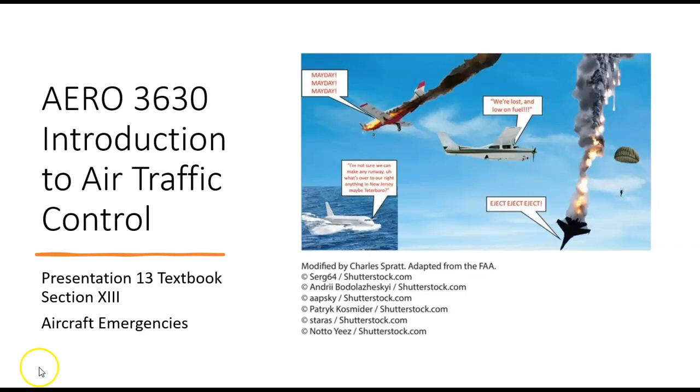Welcome to AERO 3630, Introduction to Air Traffic Control, Presentation 13 on Textbook Section 13 concerning aircraft emergencies. In this presentation, we'll go over terms and definitions, minimum and other required information during aircraft emergencies, the roles and responsibilities of air traffic controllers, and different types of aircraft emergencies.

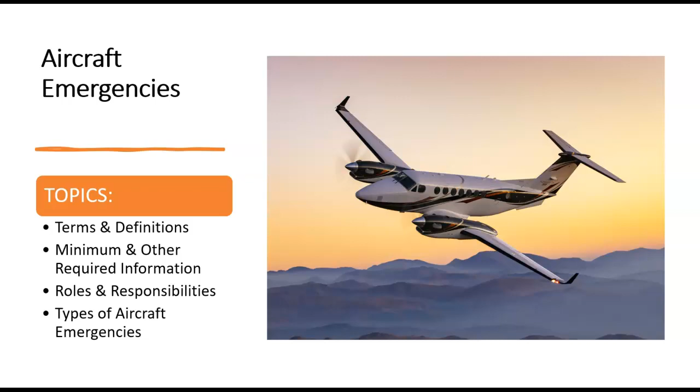It's an unfortunate part of the air traffic controller's job, but sometimes bad things happen. Sometimes airplanes fail mechanically. However, most accidents and most emergencies are created by poor aeronautical decision-making by the humans in the aircraft. Aircraft emergencies occur daily around the country. An air traffic controller can encounter an aircraft in distress at any time.

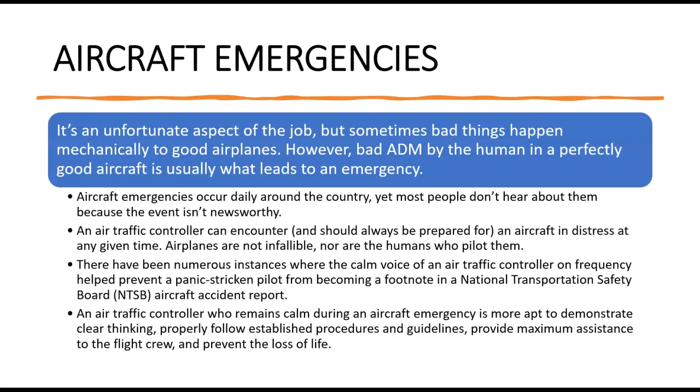And there have been numerous instances where an air traffic controller with a calm voice on the frequency prevents a panic-stricken pilot from becoming a statistic. An air traffic controller who remains calm during an aircraft emergency is more apt to demonstrate clear thinking and also follow properly established procedures and guidelines.

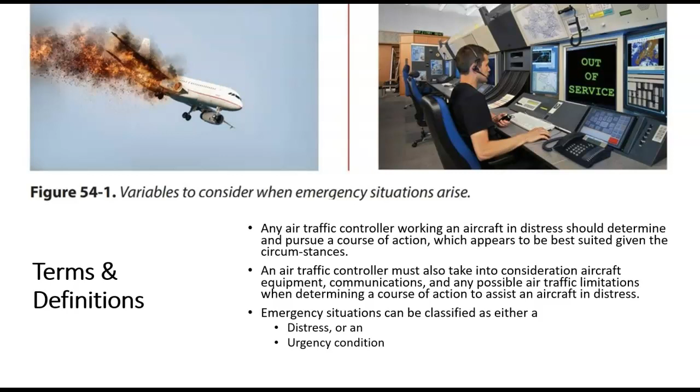So let's just talk about a couple of terms and definitions. Air traffic controllers that work an aircraft in distress need to determine what course of action to take that appears to be best suited to the given circumstances. Air traffic controllers must also take into consideration equipment, communications, and other limitations. And there are two emergency situations. They can be classified as either a distress or an urgency condition.

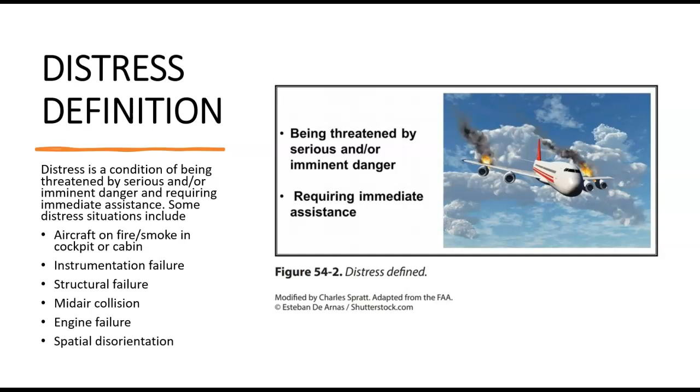A distress condition is a condition where the pilot is threatened by serious or imminent danger, and it requires immediate assistance. Some of these include aircraft fire or smoke in the cockpit, instrumentation failure, structural failure, mid-air collision, engine failure, or spatial disorientation. A pilot that is experiencing a distress situation should broadcast the word Mayday, preferably repeated 3 times, and this should get the attention of air traffic control.

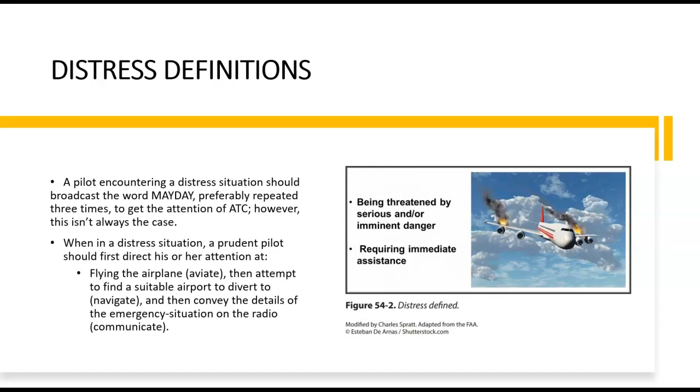When a distress situation occurs, a pilot should first direct his attention to flying the airplane. Remember, always first and foremost, fly the airplane, and then attempt to find a suitable airport to divert, and then communicate details of the situation on the radio.

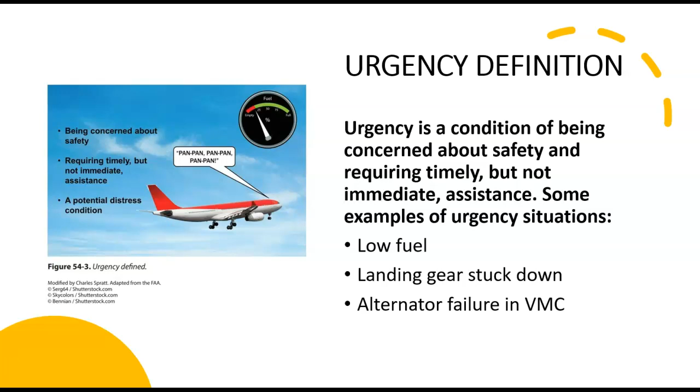An urgency condition is not as serious as a distress condition, but it's a condition where safety and timeliness are important, but immediate assistance is not necessary. Some examples include low fuel, landing gear problems where the landing gear maybe is stuck down, for example, or an alternator failure in visual meteorological conditions. A pilot that is experiencing an urgency condition should broadcast the term Pan-Pan repeated 3 times on the frequency.

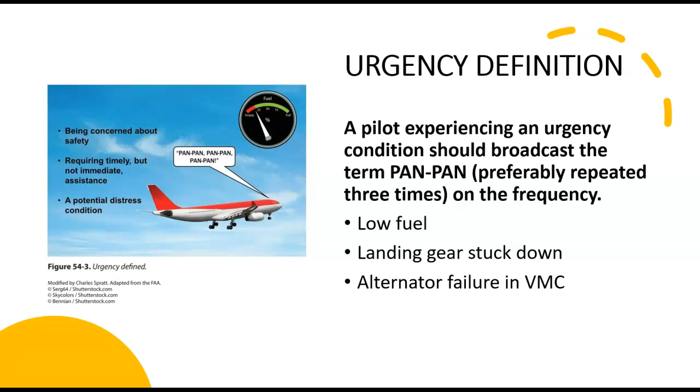Air traffic controllers are required to consider an emergency condition exists if it's declared by the pilot, air traffic control personnel, or the aircraft owner or anyone responsible for the operation of the aircraft. Controllers should also consider that an emergency exists if there's an unexpected loss of radar contact, reports indicate that the aircraft has made a forced landing, the crew is about to abandon or has abandoned an aircraft, or if they see an emergency transponder code 7700.

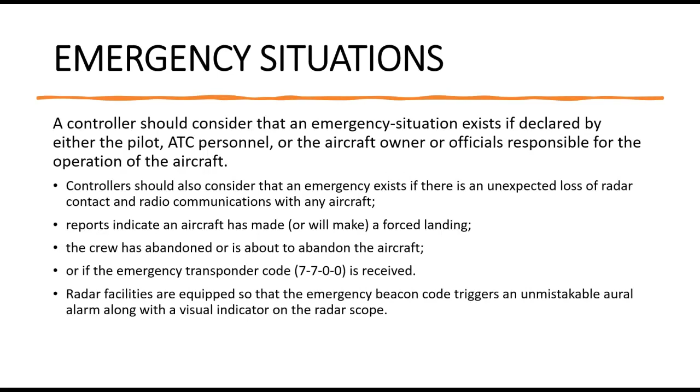Radar facilities are equipped so that any emergency beacon code triggers an aural alarm and a visual indicator on the radar scope. Air traffic controllers should also consider that an emergency exists if intercept or escort aircraft services are required, there is a need for ground rescue or that seems likely, or an ELT, or emergency locator transmitter, signal is heard or has been reported.

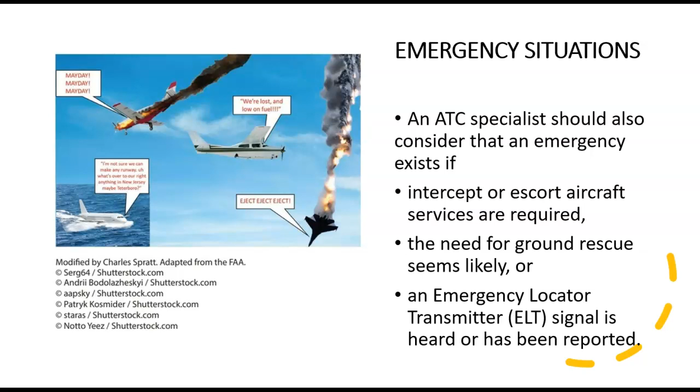The 2 universal worldwide emergency frequencies are VHF 121.5 or UHF 243.0. In civil aircraft, the VHF frequency 121.5 is the most frequently used. While 121.5 and 243.0 are both emergency frequencies, it's best to remain on the frequency with an air traffic controller if you're already talking to air traffic control. There's no need to switch to the emergency frequencies. In addition, the air traffic controller should only change the frequency to the emergency frequency if there's a valid reason for doing so.

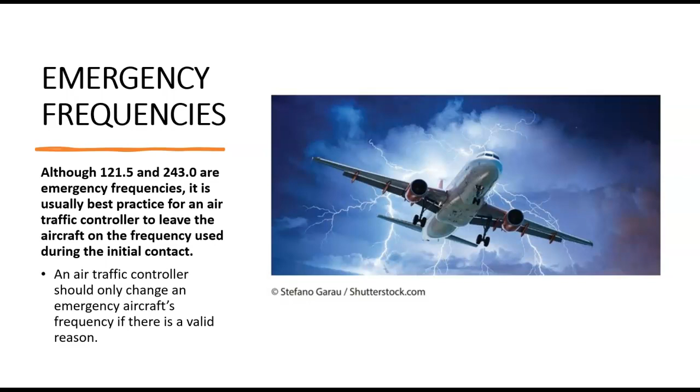Now, ELTs, or emergency locator transmitters, are required equipment for most certificated aircraft, and they are battery-operated radio transmitters that emit a distinct tone on emergency frequencies, for example, 121.5. When an ELT is armed and it experiences crash-generated G-forces or impact forces, they're designed to automatically activate and emit the signal on those two frequencies that we mentioned before for at least 48 hours.

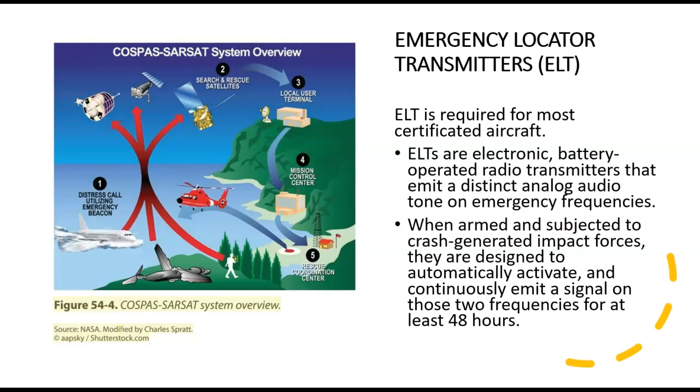The newest generation of ELTs transmit a signal on 406 megahertz and can send a digitally encoded message containing the owner's information, the aircraft data, and the exact geographic coordinates, which allows for faster location by search and rescue personnel. These ELTs are registered by the owners with the National Oceanic and Atmospheric Administration, or NOAA, and they're monitored by the COSPAS and SARSAT satellite systems.

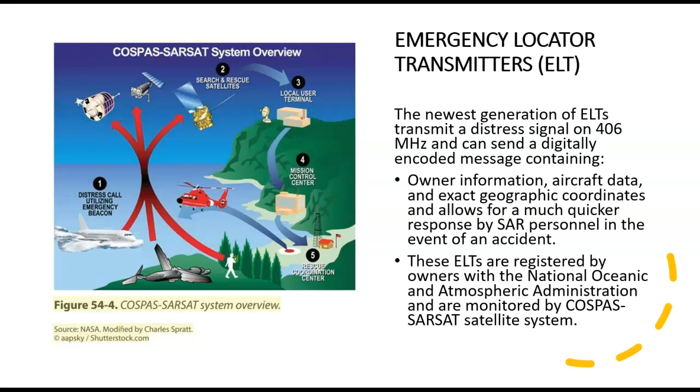Now, there is a minimum amount of information that's required by an air traffic controller in any kind of an emergency situation, and that includes the aircraft identification and type, nature of the emergency, and the pilot's desires or request.

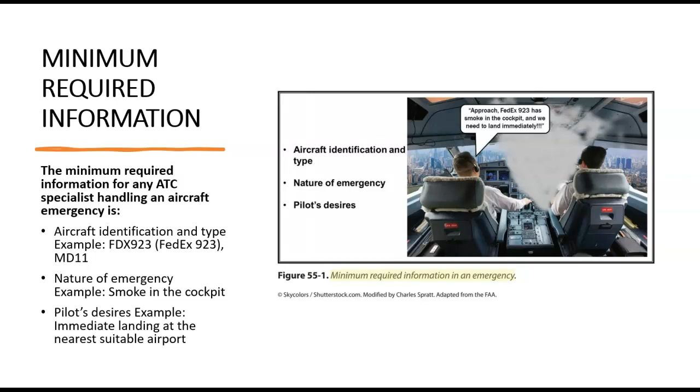Once the air traffic controller initiates communication with the pilot of an aircraft that is having an emergency, other information should be obtained as necessary, including the aircraft's altitude, fuel remaining, weather that the pilot is experiencing, pilot capability for IFR flight, time and place of the last known position, heading since the last known position, the airspeed, navigation equipment capability, NAVAID signal reception, visible landmarks, the aircraft's color, the number of people on board, point of departure and destination, and also any emergency equipment on board.

As far as roles and responsibilities are concerned, the pilot in command, or the PIC, is directly responsible and has the final authority for the operation of the aircraft. And in an emergency, the PIC has the authority to deviate from any rule and any regulation to meet the emergency. An air traffic controller in contact with the pilot should handle the emergency along with coordinating with other facilities

who can assist. The air traffic controller should only transfer responsibility of the emergency aircraft to another facility if better handling can be provided. Frequency change should only be made for a valid reason, and when the air traffic controller receives information about the emergency, the supervisor should be informed.

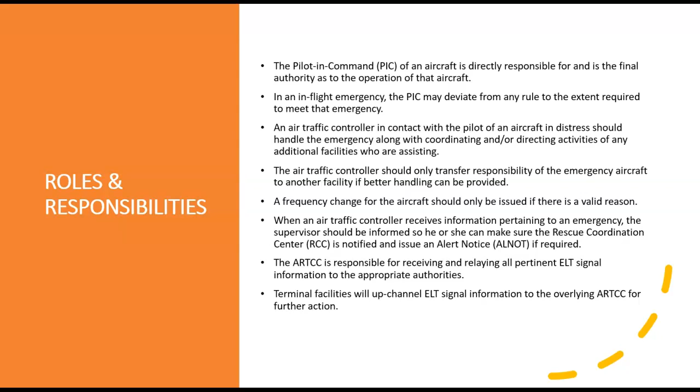Air route traffic control centers are responsible for receiving and relaying all information about ELT signals to the appropriate authorities, and terminal facilities will upchannel the ELT signal information to the overlying air route traffic control center for further action.

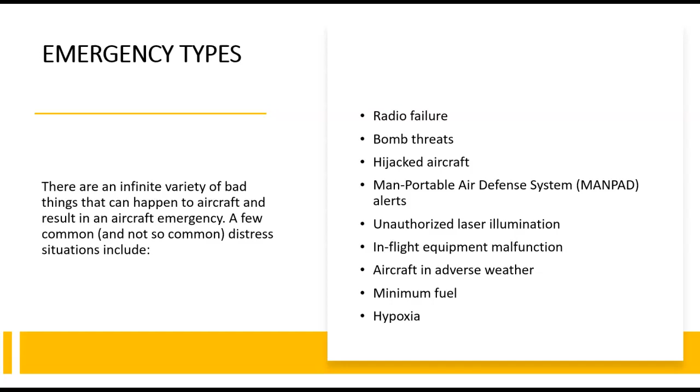The number of different aircraft distress situations is infinite. They include things like radio failures, bomb threats, hijacked aircraft, man-portable air defense system alerts, unauthorized laser illumination, in-flight equipment malfunctions, aircraft in adverse weather, minimum fuel, and hypoxia.

An aircraft that experiences two-way radio failure is expected to squawk 7600 on the transponder. And this will alert air traffic facilities that the aircraft is having problems with its two-way radio communication. An aircraft that squawks 7600 causes RDOF in en route facilities and RF in terminal facilities to appear

on the radar scope. So when an aircraft experiences a two-way radio failure, the controller should establish or attempt to establish communications using other methods such as emergency frequencies, navaids with voice transmission capability, or attempting to relay instructions through other aircraft.

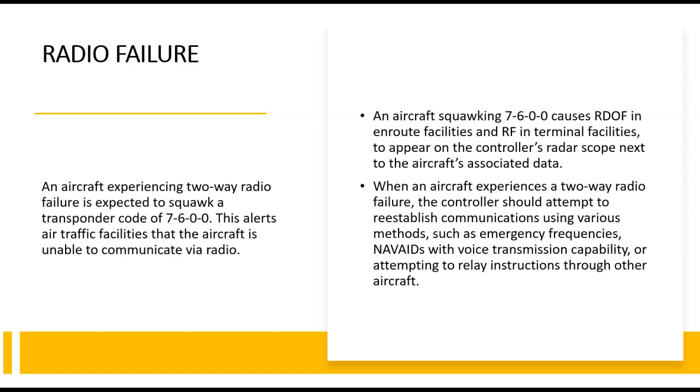If a bomb threat is received from any source, the air traffic controller is required to notify the supervisor or the facility air traffic manager. If a bomb threat is general in nature, it's always handled as suspicious and reported to the appropriate authorities.

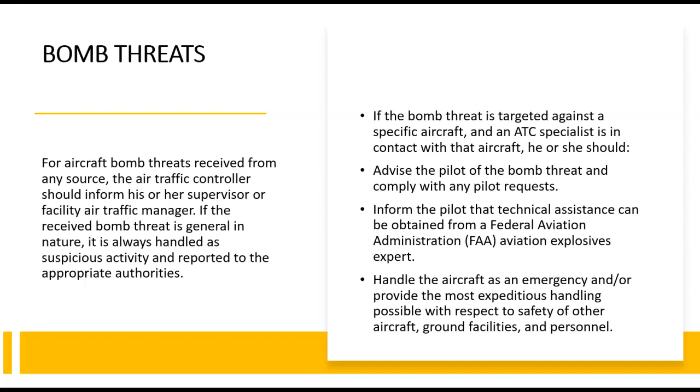If a bomb threat is targeted against a specific aircraft, the air traffic control specialist in contact with the aircraft should advise the pilot of the bomb threat and comply with any pilot requests. Inform the pilot that technical assistance can be obtained from the FAA, including an aviation explosive expert, and handle the aircraft as an emergency. Provide the most expeditious handling possible with respect to safety of other aircraft and ground facilities, and also personnel.

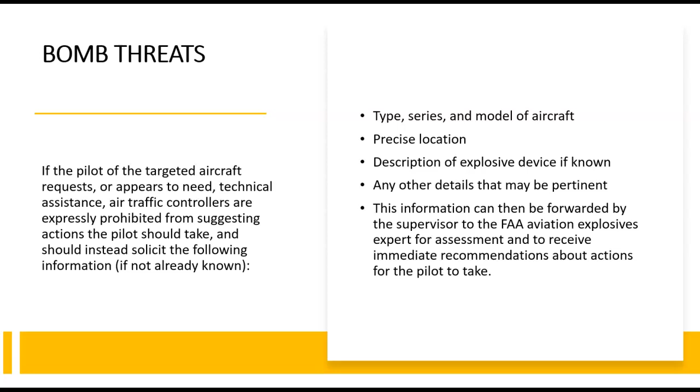If the pilot of a targeted aircraft needs technical assistance, air traffic controllers are prohibited from suggesting any actions, but instead should solicit the following information if it's not already known: type, series, and model of the aircraft, the precise location of the aircraft, a description of the explosive device if it's known, and any other details. And this information can be forwarded to the supervisor, to the FAA aviation explosive expert for assessment, and to receive immediate recommendations about actions for the pilot to take.

An aircraft that is illuminated by a laser is a very serious situation, and it's also a violation of federal law. High-powered lasers can temporarily blind a pilot, cause the aircrew to take evasive action to avoid the laser, and aircrews consider lasers an in-flight emergency.

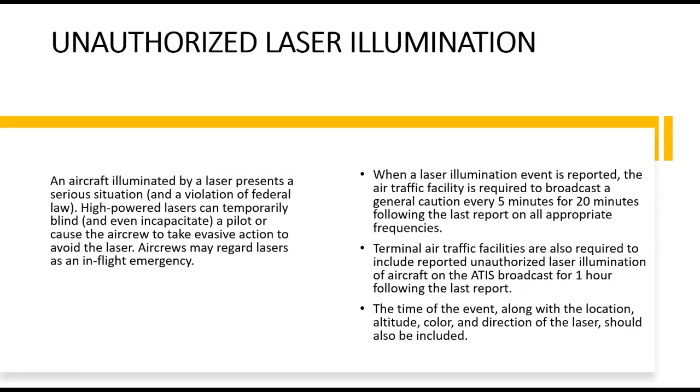When a laser illumination is reported, air traffic control is required to broadcast a caution every 5 minutes for 20 minutes following the last report. And also, they're required to include unauthorized laser illumination of aircraft on the ATIS broadcast for 1 hour following the last report. The time of the event, along with the location, altitude, color, and direction of the laser should be included.

In-flight equipment malfunctions, including complete failure of equipment that may affect flight safety, separation standards, or the ability of the aircraft to proceed under instrument flight rules to navigate in reduced vertical separation minima airspace, all are considered in-flight emergencies.

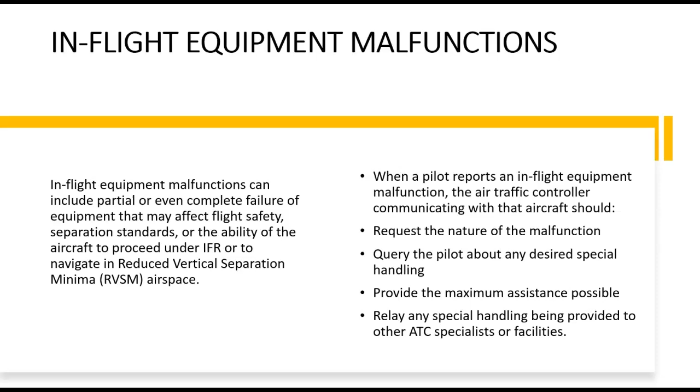And when a pilot reports an in-flight equipment malfunction, the air traffic controller should request the nature of the malfunction and ask the pilot about any desired special handling and provide maximum assistance. Relay any special handling being provided to other ATC specialists or facilities.

Minimum fuel is not considered an aircraft emergency. It indicates that the aircraft has just enough fuel to accept little or no delay when they reach their destination. And again, it's not an emergency. It does not require any kind of special handling. Unlike an emergency fuel situation where the pilot has declared a fuel emergency, minimum fuel does not imply the need for traffic priority.

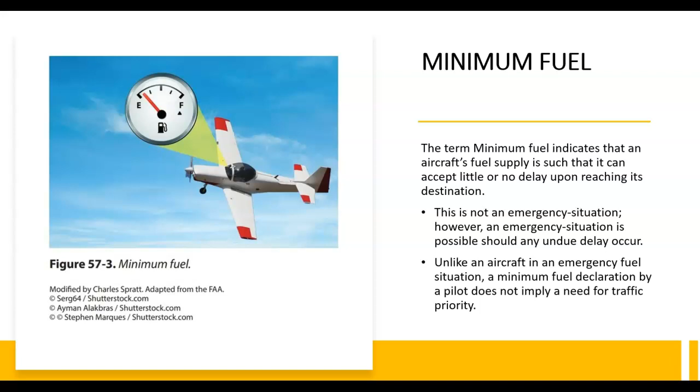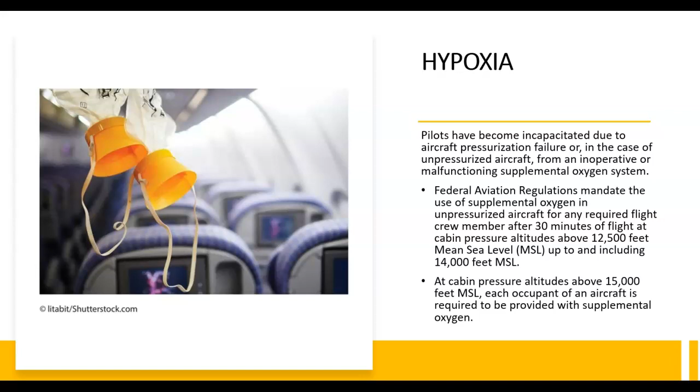The FAA requires the use of supplemental oxygen in unpressurized aircraft for any flight crew member after 30 minutes in flight between the altitudes of 12,500 and 14,000 feet MSL. At cabin pressure altitudes above 15,000 feet, every occupant, including passengers, is required to be provided with supplemental oxygen.

One very well-known hypoxia-related aircraft accident occurred in an aircraft, a Learjet 35, occupied by the professional golfer Payne Stewart. The aircraft was carrying Stewart and 5 other people from Orlando to Dallas, but failed to turn west toward their destination over North Florida. Instead, they continued on a straight line until they ran out of fuel over South Dakota.

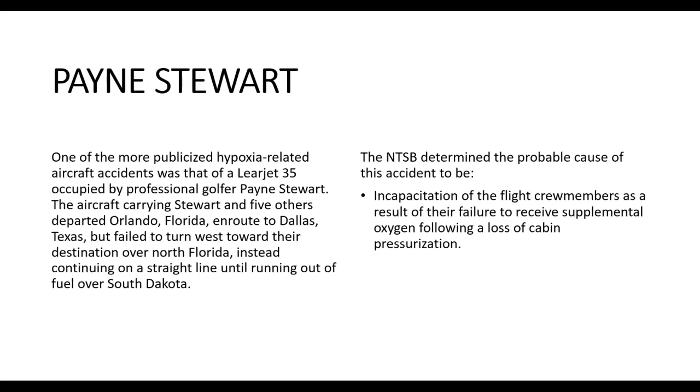And the NTSB determined that the probable cause was incapacitation of the flight crew members as a result of their failure to receive supplemental oxygen following the loss of cabin pressurization.

Well, that's the end of presentation 13 on aircraft emergencies. Next, we'll handle the air traffic control facilities' responsibilities when it concerns search and rescue operations.